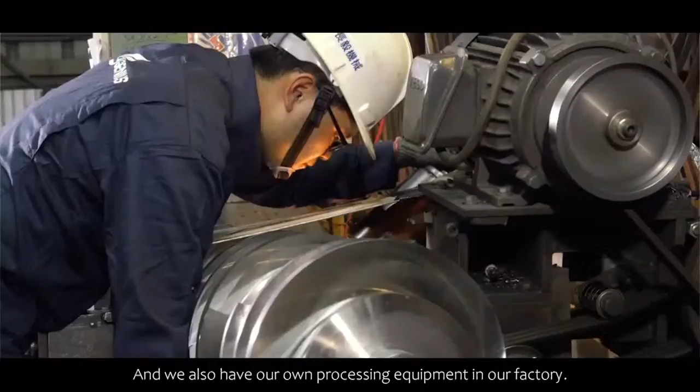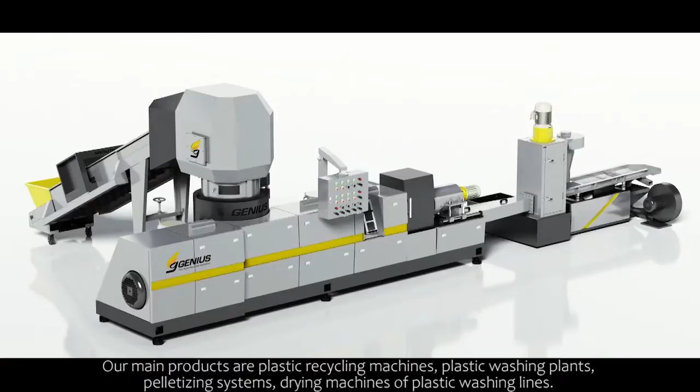Mr. Peter, what are the main products Genius Machinery manufactures? Our main products are plastic recycling machines, plastic washing plant, pelletizing system, drying machine of plastic washing line. Additionally, we also produce shredders and crushers.

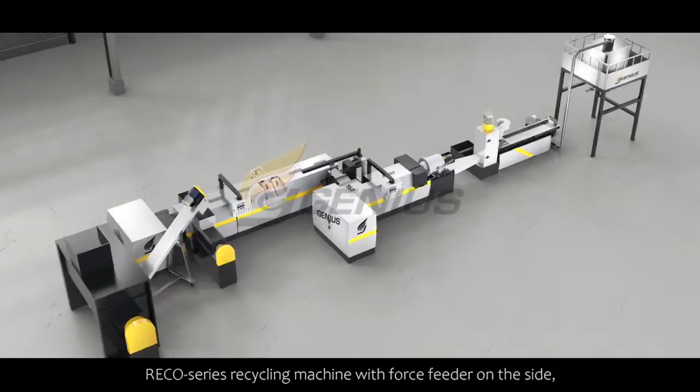Oh, very interesting, Mr. Peter. Talking about that, what are your most popular machines? Our popular machines are KRIEGER-Series cutter compactor recycling machine, RECO Series recycling machine with force feeder on the side, and W-Series squeeze dryer. Mr. Peter, you mentioned about your KRIEGER-Series. Can you explain more about those machines?

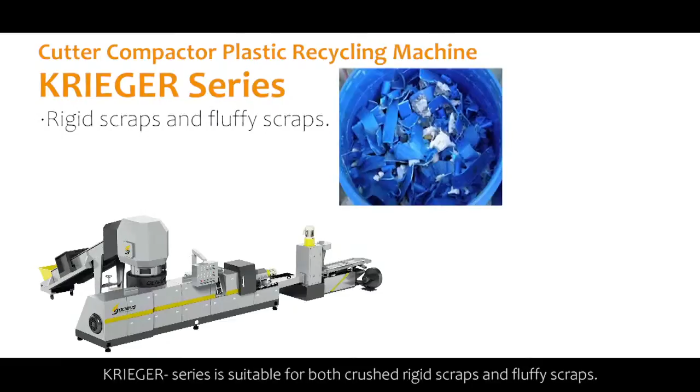KRIEGER-Series is suitable for both crushed rigid scraps and fluffy scraps. The capacity of this series is from 80 to 1,500 kg per hour, depending on the model.

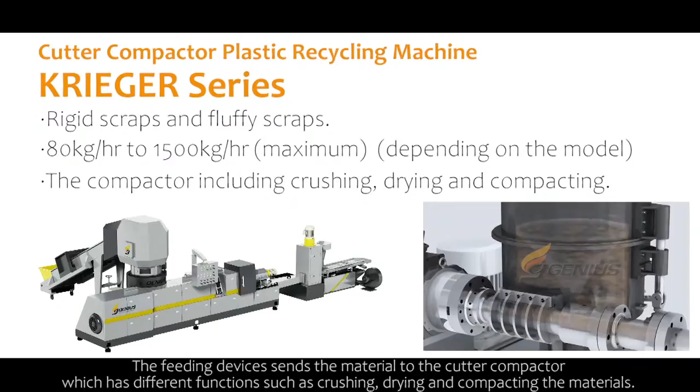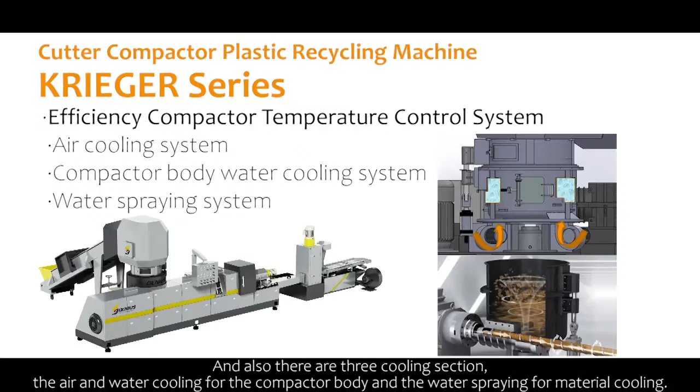The feeding device sends the material to the cutter compactor, which has different functions such as crushing, drying, and compacting the materials. It steadily sends material into the extruder. There are also 3 cooling sections: air and water cooling for the compactor body, and water spraying for material cooling. The operator can set the temperature of each to stably control the compactor's temperature.

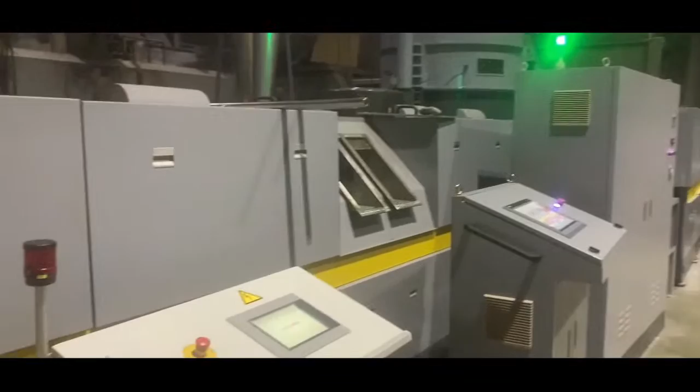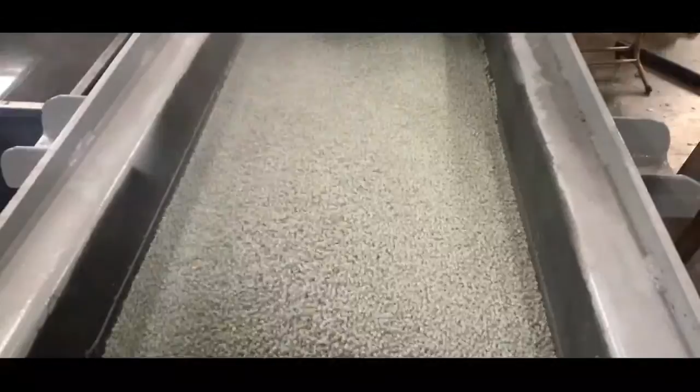Mr. Peter, your RECO Series are recycling machines with force feeder. Can you explain to us the features of these machines? RECO Series recycling machines are equipped with the force side feeder, which has smaller motors and high torque reducer.

The crushed rigid scraps are sent into the extruder steadily. If you recycle rigid and crushed scraps only, this model will be the best. It can save much energy in processing.

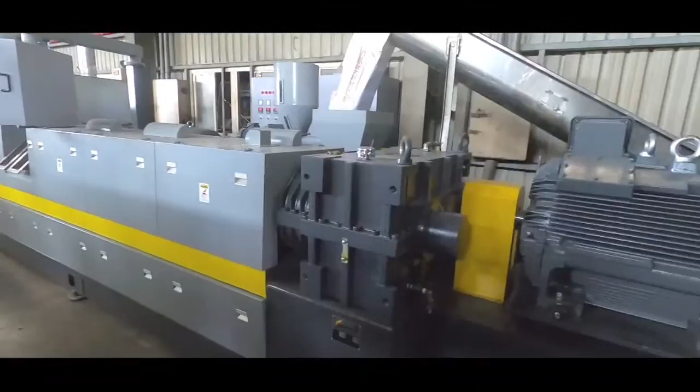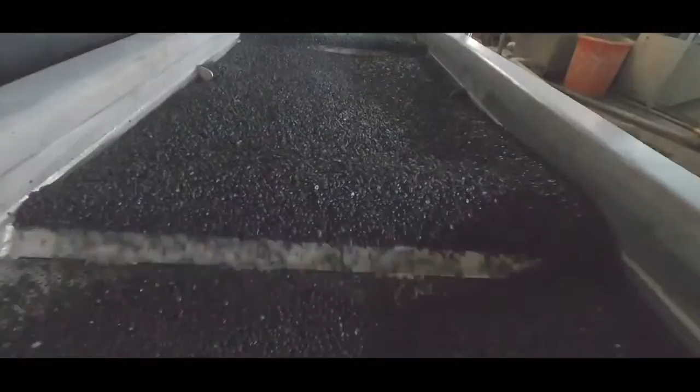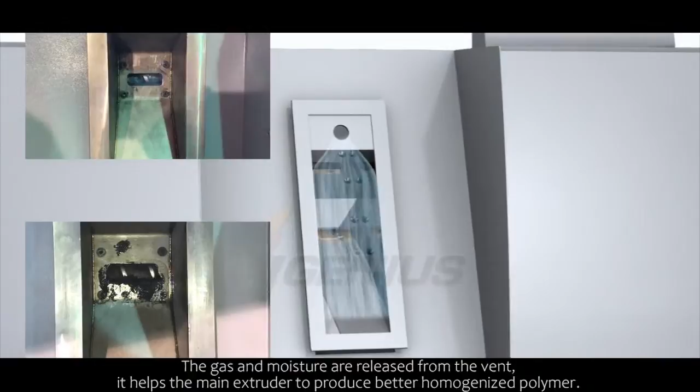Mr. Peter, your KRIEGER and RECO Series are well recognized in the industry. Is there any specialty on them? For both KRIEGER and RECO Series, we install a degassing system. The gas and moisture are released from the vents. It helps the main extruder to produce better homogenized polymer. An optional vacuum system is available to increase the degassing effect.

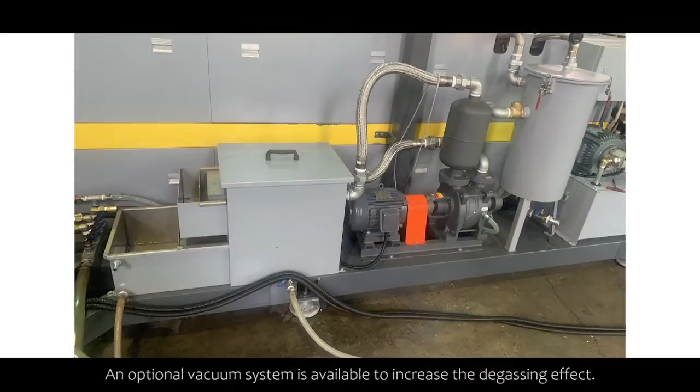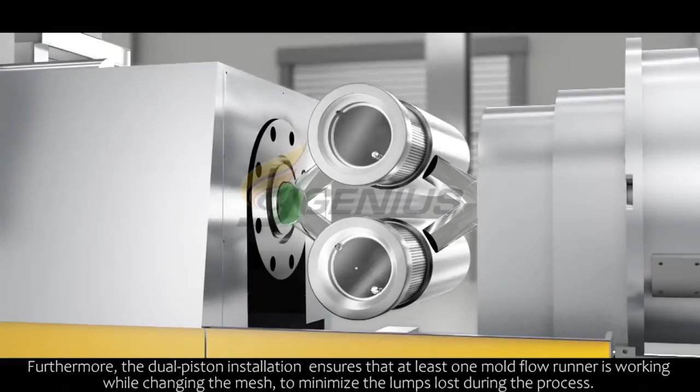And we have different kinds of filters. One is the dual piston filter, which has a larger filtration area. From our experience, it could provide up to 3 times the filtration capacity than the pure plate filter. Furthermore, the dual piston installation ensures that at least one mold flow runner is working while changing the mesh, to minimize material lost during the process. We also collaborated with European companies who manufacture self-cleaning filtration systems like Fimic or Ettlinger.

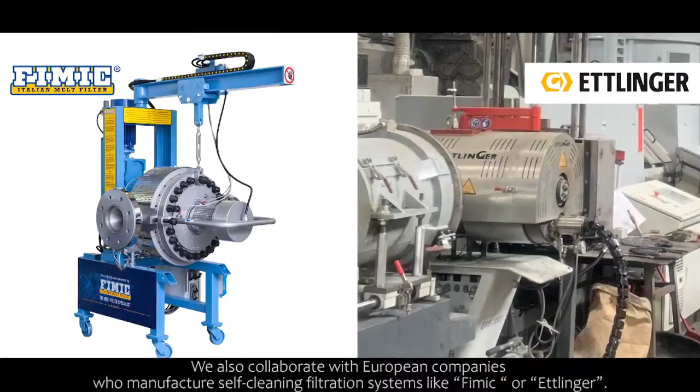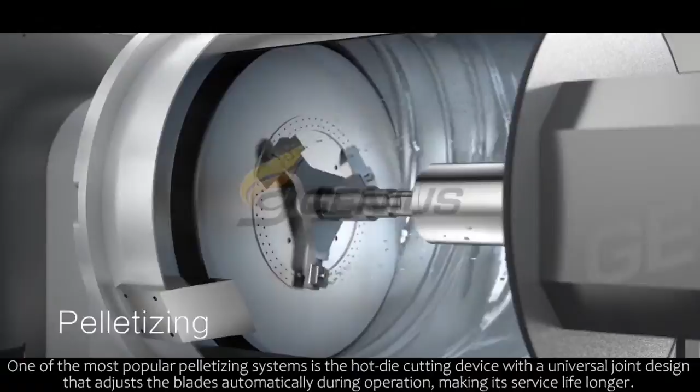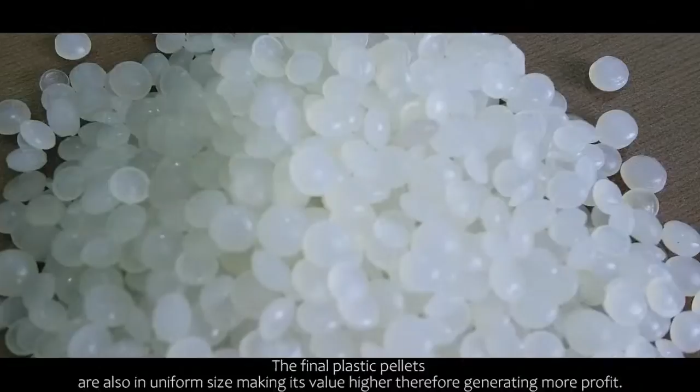Regarding the pelletizing system, we provide different solutions for different materials. One of the most popular pelletizing systems is the hot die cutting device with a universal joint design that adjusts the blades automatically during operation, making its service life longer. The final plastic pellets are also in uniform size, making its value higher, therefore generating more profit.

You also mentioned about your DW-Series squeeze dryers. These are very popular in different sectors of the industry. Can you give us a little bit more insight about this? Yes, our DW-Series squeeze dryer has a specially designed screw that removes water from the washed fluffy scraps.

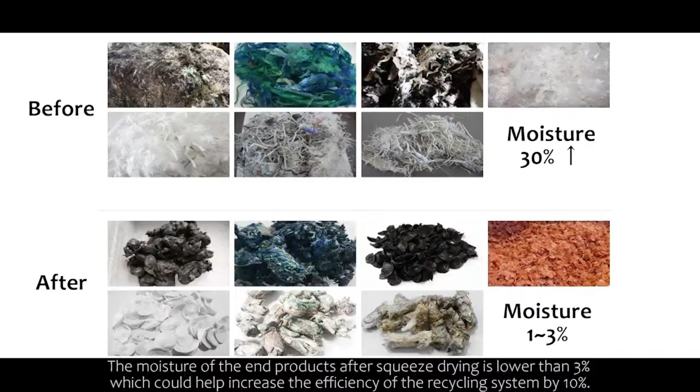The moisture of the end product after squeeze drying is lower than 3%, which could help increase the efficiency of the recycling system by 10%. Some of our customers recycle dirty plastic films. They normally buy squeezers to reduce moisture of the washed plastic films. After the moisture has been removed, the products are better compacted and more solid. The customer can then recycle this squeezed material by just using our RECO Series. They don't need to use the cutter compactor recycling machine, therefore saving energy.

Mr. Peter, usually one of the main questions of customers is what materials can be processed in different machines. How about your machine?

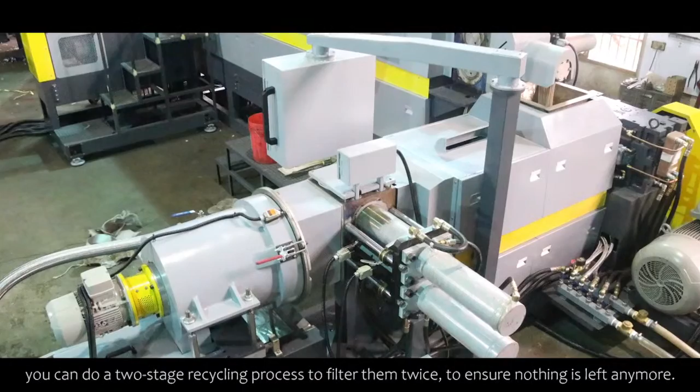General plastic - most of our customers recycle PE, PP, PS, PC, PET, ABS materials and so on. It may be clean or dirty, fluffy or rigid. If the material is still dirty after washing, or contains labels or other unnecessary stuff, you can do a two-stage recycling process to filter them twice to ensure nothing is left.

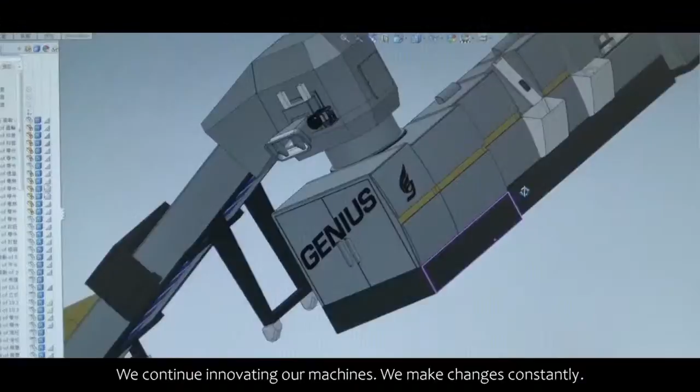Mr. Peter, what makes Genius machines different from other competitors? We make sure that we meet the customer's spec and needs. We continue innovating our machines, making changes constantly, adding new features and functionalities. The old client can see the difference between our older and new models. We also specialize in customizing machines according to the customer's material. The most important value is we take pride in our unparalleled after-sales service.

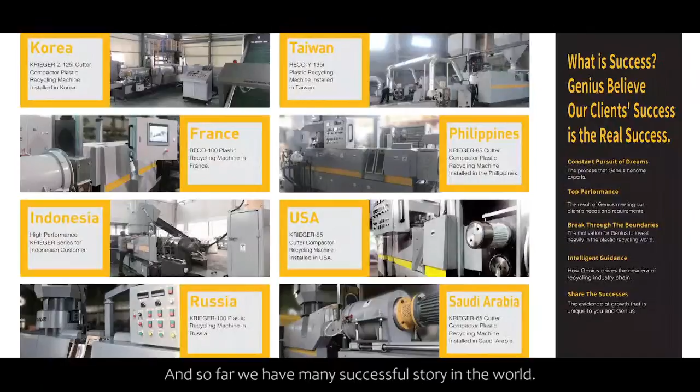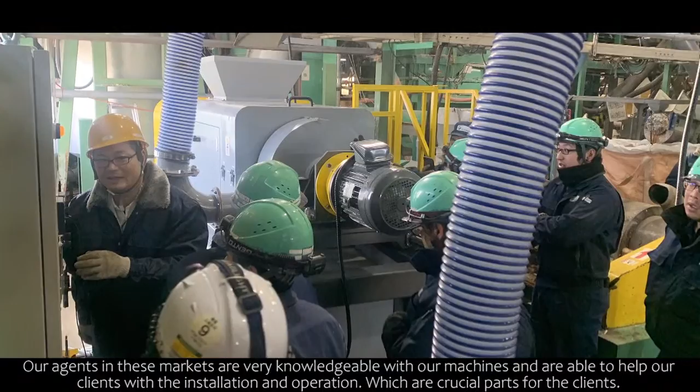In the last few years, we collaborated with agents from different countries. Our strongest markets are Japan, Russia, and Malaysia. Our agents in these markets are very knowledgeable with our machines and are able to help our customers with the installation and the operation, which are the crucial parts for the customers.

Is there a specific market you are trying to develop business in? We are currently eyeing strengthening our business in Latin America, as it's a big market and we have actually already made sales in those countries like Brazil, Ecuador, Peru, and so on.

Mr. Peter, nowadays, what are the main challenges in the industry? A lot of industries have been struck by this current pandemic, and unfortunately, ours is one. This year, our team cannot visit customers abroad, and we cannot display our machines in exhibitions. It's not easy to present our machine without participating in them. All similar events were cancelled this year.

Mr. Peter, how are you coping with these challenges? We have been trying different methods to reach out to customers and provide support, like online conferencing. Fortunately, we still have some sales this year, particularly from existing customers and those who already discussed with us prior to the pandemic.

I'm glad to hear that you still get some orders from previous customers, but how about new customers? We didn't get to visit new customers this year. At the moment, it's not as busy as it used to be, and we have more time. We have been focusing on the innovation of our machines, using this time to develop new machines with higher capacity and better quality.